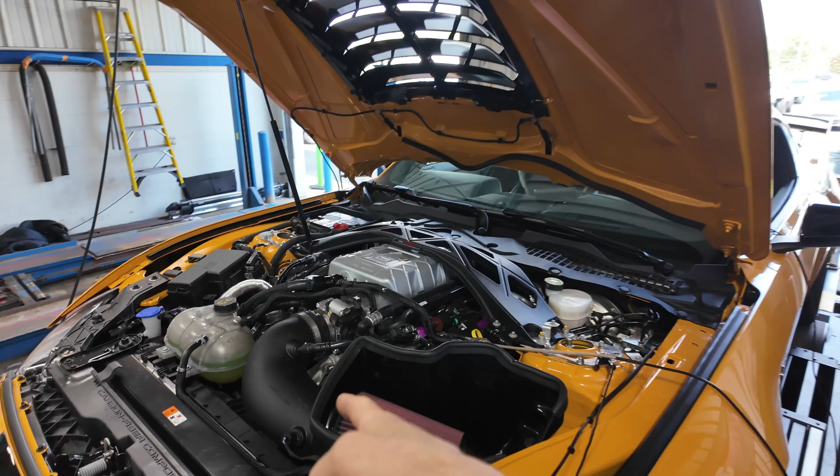So the 800R package gets into some bolt-ons here on these GT500s. So I'll walk up here and we'll take a look. So JLT Cold Air, we definitely do that. That's our favorite intake. It does have the VMP Predator lid and cooler, the race cooler.

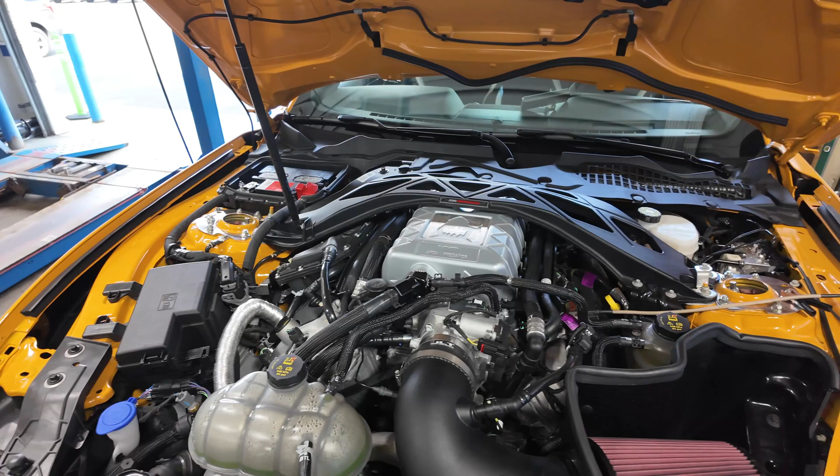It's got a set of 2-inch long tube headers on it, American Racing headers, and the 3-inch American Racing X pipe with the silencers, and those are hooked to the stock mufflers. The R package that we do on these cars is a bunch of suspension goodies. We kind of dig into the BMR catalog quite a bit.

We do radius rod bushings in the front. We do all the arms in the rear. We do the toe links. We do the camber arms. We do the big rubber control arm, lower control arm bushing on these S550s. We do the spherical bearing there. We do the toe link bushings in the knuckles that Steeda/Ford Racing sells. We lock the cradle out. We lock the diff out with urethane.

All that stuff combined helps these cars immensely on track with the steering feel, the road holding. I should also mention, we also do Ground Control caster camber plates, so we can dial in some camber. We like running a little over 3 degrees of camber on these GT500s in the front and a little over 2 in the rear when we're running slicks. He does run slicks on this car, Hoosier R7s. So we spec our alignment settings for slicks.

But as far as the power mods go, what we're looking at today on the dyno, it's just a bolt-on package. We leave the stock pulley for guys that road race these cars, unless they're really trying to push stuff. I highly recommend just leaving the stock pulley. These things make plenty of horsepower. And we call it an 800 package because it makes 800 at the rear tires on pump gas.

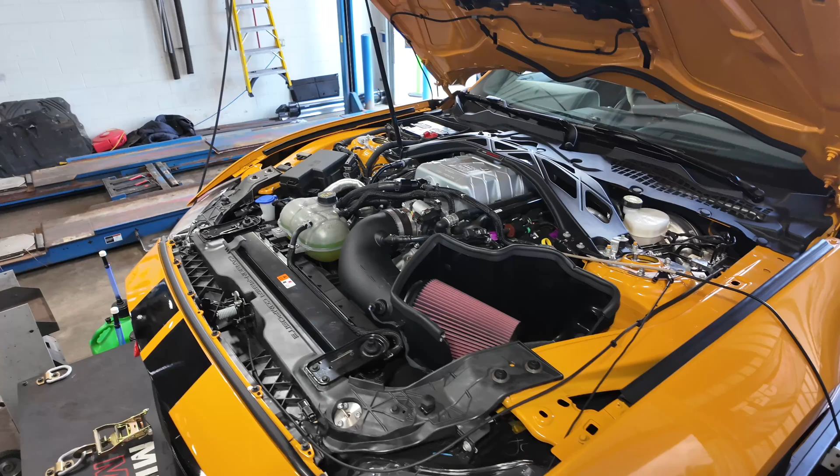So, like I said, cold air, lid, cooler, headers, and that's pretty much it. It's just basically external bolt-ons on this car. And we are increasing the power over 100 at the rear wheels. So move the screen here. We can take a look at where I'm at so far. I left up most of the working runs here. I've done enough of these 800 packages where I can throw a startup tune in it, and I really only have to do 3-4 pulls on these things to get these dialed in.

Since this is pump gas, it still has the stock fuel system on it, stock injectors, stock fuel rails. We're not getting too far into adjusting fuel system stuff. I do obviously have to make some changes to the speed density model. These GT500s do not run a mass airflow sensor. They're just strictly speed density based. And so you get into the speed density model to adjust fueling.

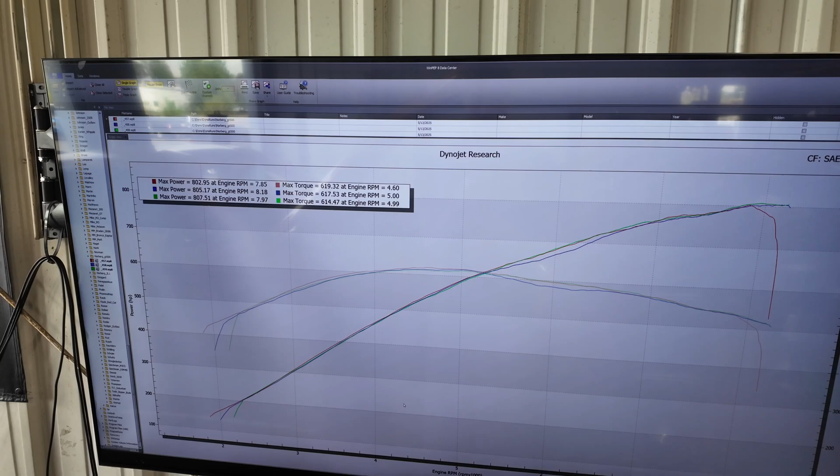And the headers do change the fueling. I do have to add between 3 and 6%, depending on where in the RPM range. Typically in the mid-range, where the headers actually add a lot of scavenging effect of the exhaust to the engine, in the mid-range primarily.

Obviously they help flow up top, but also, because of the long tubes merging into a collector, the exhaust pulses help pull low pressure into the other tubes as the cylinders are firing, and that scavenging effect really is amplified in the mid-range, between 4,000 and 6,000 RPM.

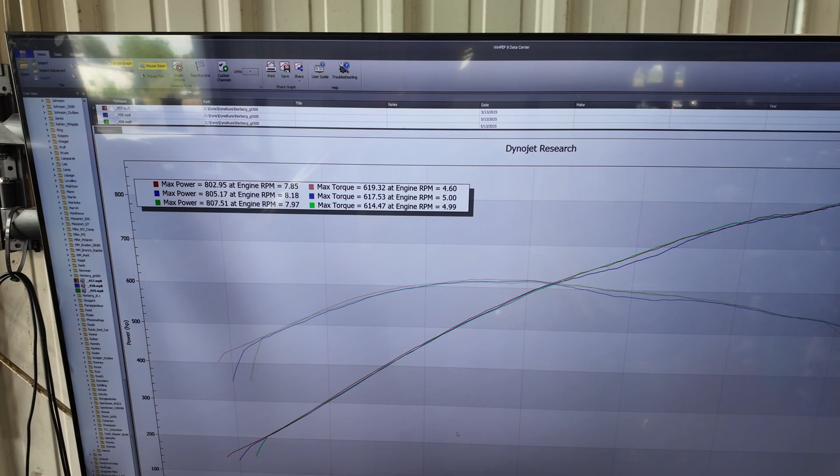So that's usually where I have to end up adding the most amount of fuel when we do long tube headers on these things. But pretty much across the board, I have to add fuel the most in the mid-range. So yeah, you can see this is our 800 package, and we are at just over 800 wheel.

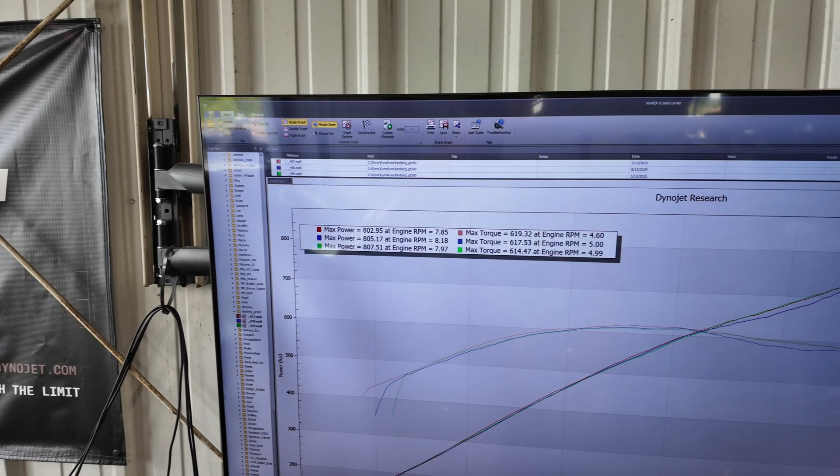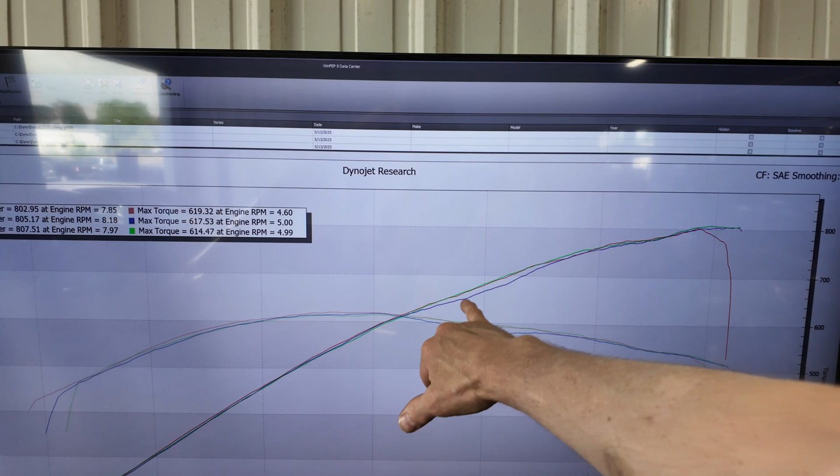The first pull there was the red one. It was the timing I had adjusted a little bit. The next one I took a little bit too much out and added a little too much fuel on that blue. And then the green one was the one I just did. And you can see it's nice and smooth.

I'm going to do one more here, obviously. We'll video that, and we'll take a look at the final results and the dyno graph. But so far, this is pretty typical of our 800 package. You know, again, just some external bolt-ons. Yeah, I mean, it doesn't take much to get these types of numbers out of these cars.

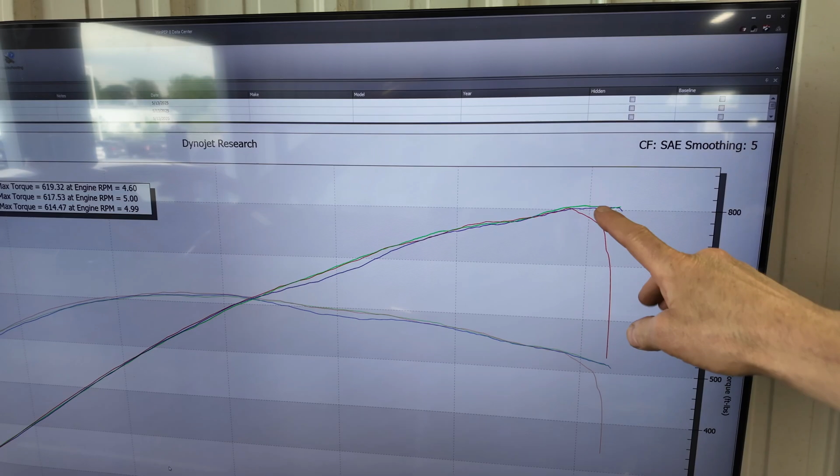Obviously, we are extending the factory RPM range quite a bit. Well, not quite a bit, but about 500-600 RPM. Typically, I'm revving these cars, I set the rev limiters at 8,400 on the stock boost level like we see with these. Since this does not have a ported blower, we are still seeing about stock boost levels.

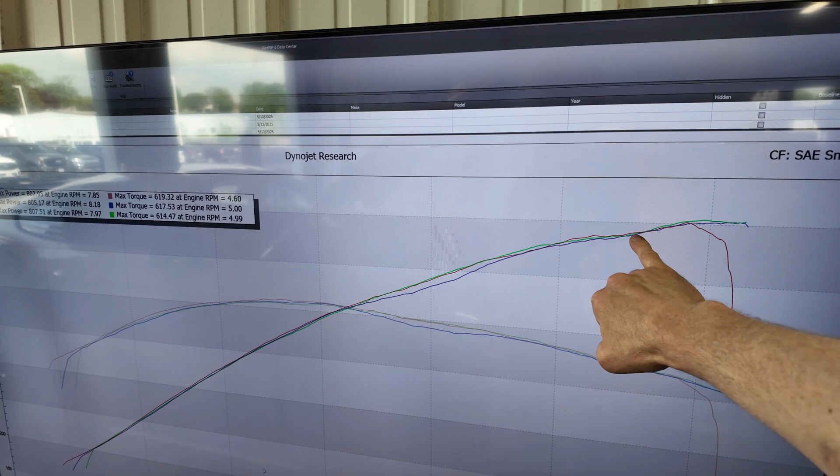You know, we do pick up about a pound of boost going from 7,500 of the factory rev limiter up to the 8,400. We are picking up a pound of boost just revving it that little bit extra. But because I'm not adding a whole ton of boost to it, I'm still comfortable revving them pretty high.

Now, once you start putting higher boost numbers with ported blowers, you do have to be mindful of the stock valve springs. You do run into a limit of those when you start putting more boost pressure in the manifold, and subsequently in the head ports, which puts more pressure against the valves that wants to push the valves open, and you end up with valve control issues if you rev them too high with too much boost.

So, because again, we're on the stock pulley, we're seeing just over stock boost, I am comfortable with an 8,400 hard limiter. I set the transmission up in these cars to shift about right at 7,900 for road racing. I don't like going any higher than that for road racing, just for engine longevity and for oil temperature.

So when we're really revving them high, everything is working a little harder. The oil pump's working harder to pump the oil. The VCT actuators are working harder. So I typically keep it just under 8,000, up from the 7,400. So I up the shift point about 500 RPM.

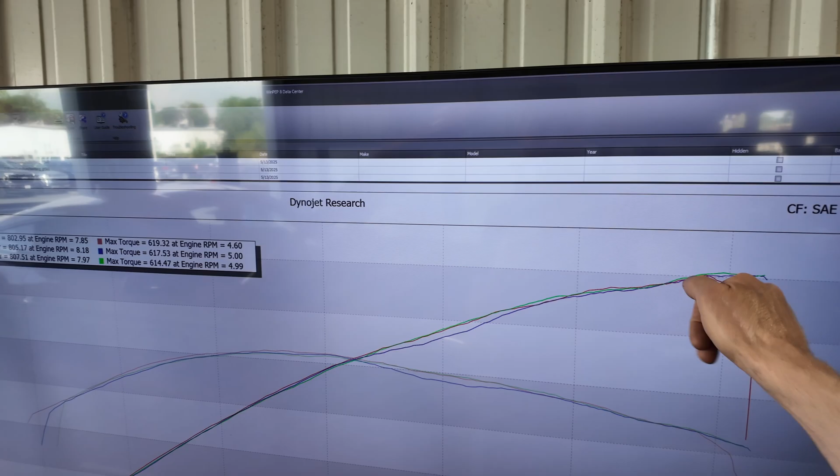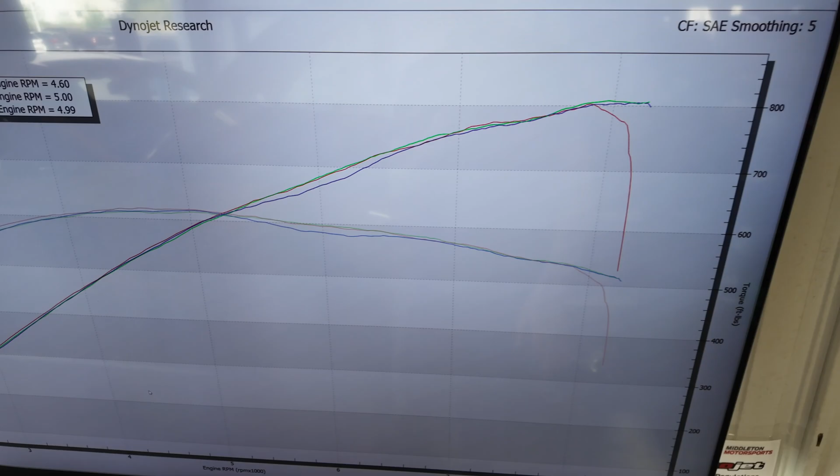But again, then you're getting into that little bit extra horsepower you're making at the very top here. So instead of shifting right here at 7,500, we're shifting it up here just before 8. So you take advantage of that little extra power we make up here. Otherwise, we're up over stock.

These cars typically on 93 octane will make 680 on average. Some are making 670 if maybe they're a little newer car with a tighter engine. I've seen as high as 690 out of a completely stock one. That's about as high as I've ever seen. So we are up over 100 at the rear wheels.

I've dynoed dozens of these things bone stock, and they all make between that number depending on the fuel. The majority of that variance comes from if it's 91 octane or 93 octane. Again, because the timing system in these cars is floating and closed loop, it will add timing with better fuel automatically.

So I'm gonna put the camera down. We're gonna spin one more pull up here. We'll take a look at the final numbers. Hopefully it's not too heat soaked. It's been sitting here for about 10 minutes with the fans off, so I'll kick the fans on, and the car should be still up to temperature as far as coolant and oil.

And we'll look at our final number. I'll probably clear these runs off and just leave that 807 so we're not looking at a bunch stacked up, because it gets a little busy on the screen. And then we'll look at the data log, and we will wrap this one up.

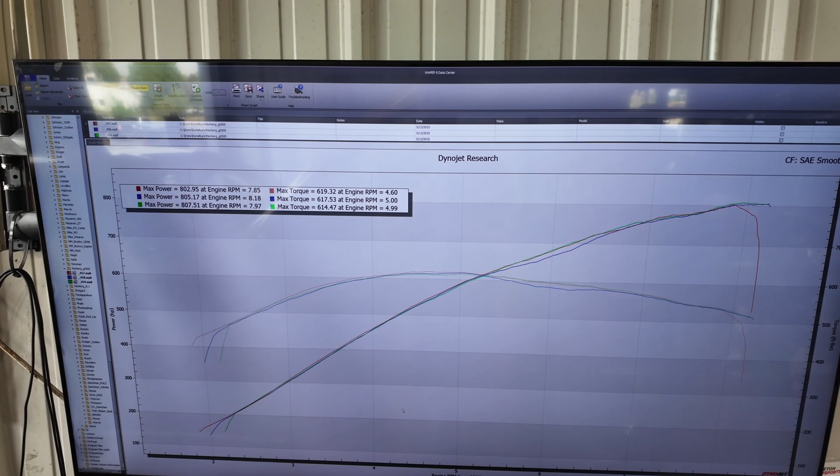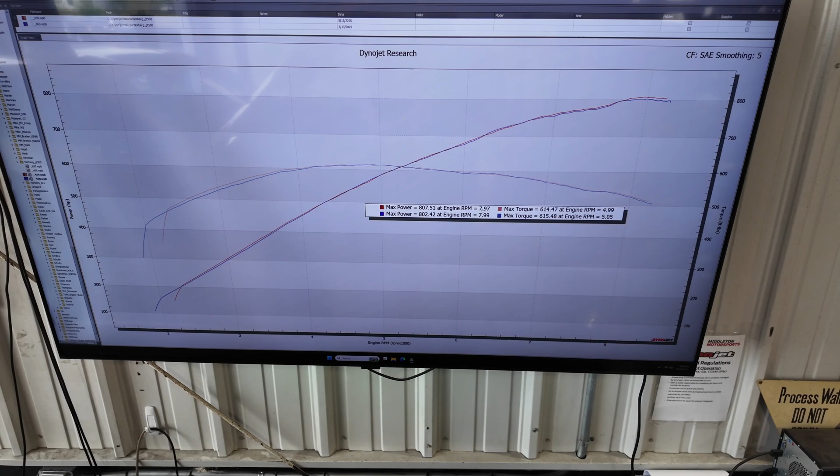Looks like it made just a smidge less up at the top, but we were about 10 degrees hotter on the manifold temperatures on that pull versus the red pull. So, yeah, just because it sat here and I had the fans turned off while I was getting the camera ready and stuff. It was about 100 degrees on the blue pull, about 90 degrees of manifold temperature on the red pull. So just lost a little bit, but you can see the graphs are pretty much overlaying. Yeah, I'm not too worried about that.

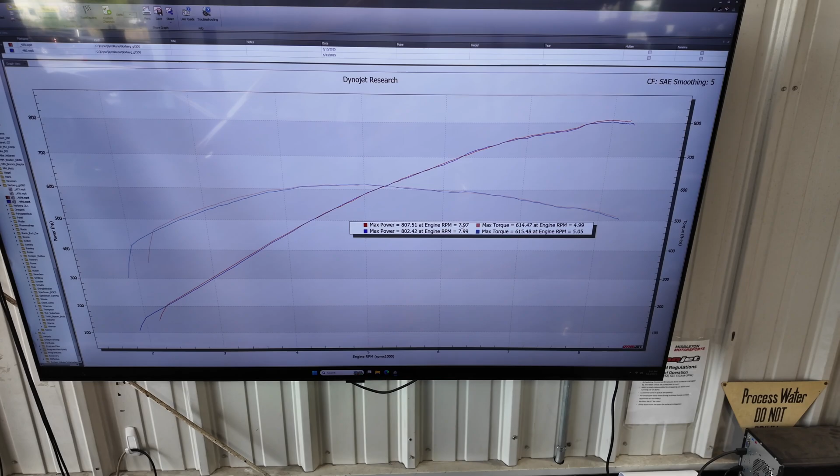That's a 5 horsepower difference. At this power level it's kind of just a variance of dyno and temperature. So because the graphs overlay so nicely, that's looking really good to me. Again, still over 800 wheel, still hitting that 615 torque, right about where we were. So yeah, that looks good. That's pretty typical for our 800 package, that dyno graph. Nice smooth curve. Real straight line, real broad power band. Obviously supercharged car, this style blower will make that. So we'll take a look at the data log.

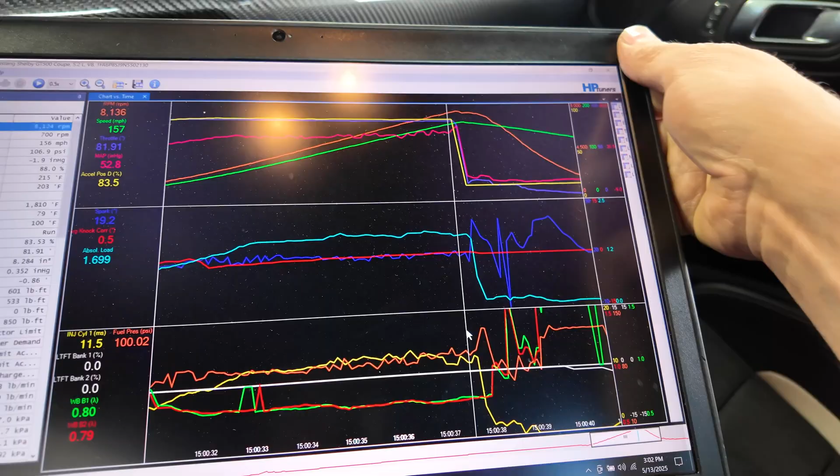Jump in the car here. All right, let me see if I can get the camera lined up. All right, so without too much glare.

All right, so timing. Since this is a pump gas car, we're definitely gonna see a little bit of knock correction going on up and down. If you've watched some of the other videos where I'm doing E85, typically I'll just kind of set the timing where it's gonna make peak power, and the HDFX system really won't do much on those cars. But because this is a pump gas car, obviously I'm not trying to throw a bunch of timing at it and then let the knock sensors pull it all out.

Typically I'll try to run the borderline table about where it's going to be happy, and then if he's got a better tank of fuel, it might add a little bit. And you can see it did pull about a degree when I first rolled into it there, but it came back, and then even then some, it added half a degree at the top there.

So this car, again, 93 octane on these cars with this bolt-on package with the stock pulley, you're into the low 20s for timing. 91 octane, you'll typically be 17 to 18 degrees, and that's where I talk about that 20 horsepower difference between even a stock pulley making 670 to 690, or this 800 package making a little over 800 or 780-ish. You know, I've even seen as low as 775 on some of the poor 91 we have around here, and some guys just choose to go to those fuel stations because it's easy, and the cars will still run okay on it. They just run a little less timing.

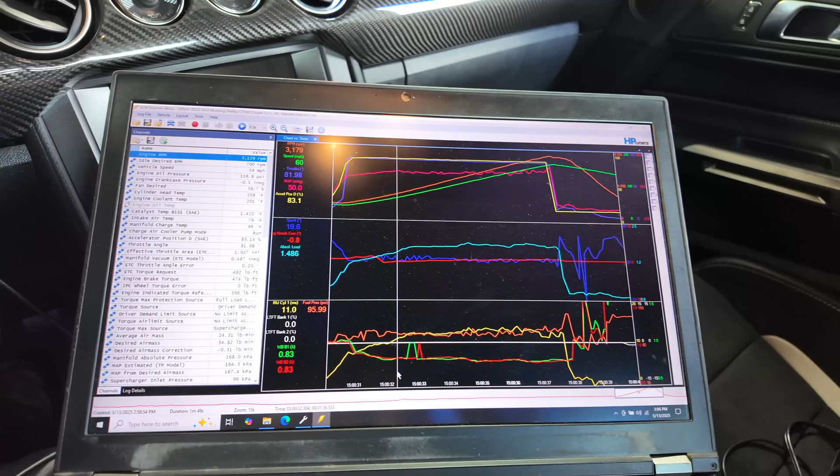So air-fuel ratio, I kind of follow the factory on the pump gas, bolt-on stuff. I kind of follow a little bit of the factory fueling strategy where you can run it a little bit leaner where the boost is a little bit lower in some of the lower RPM ranges. But once you get up past 5,000 RPM, I like putting a little bit more fuel in these things. Obviously, we're getting rid of the cat enrichment on the fueling strategy. And I'll typically target 0.79 lambda on gas and 0.8 lambda on E85.

I find on gasoline, 91 and 93, especially the 91, even 0.78 if it's strictly going to be a 91 car, because they will take a little more timing if they're rich like that. And the timing does make more of a difference than adding a smidge of fuel. Now, richening them up without adding timing will take some power away, but the fact that we can add maybe a degree more by putting 0.78 versus 0.8 on pump gas, the 5 or 8 horsepower you lose with the extra richness, you're going to gain back, and then some with an extra degree of timing.

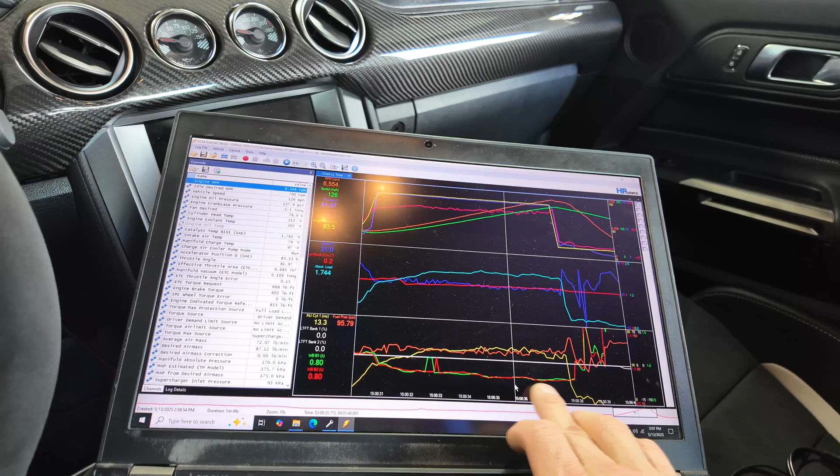So this car I'm targeting 0.79 at the top here, so you can kind of see how the air fuel is leaner, and then it steps down right in here, right in that kind of low 5,000 area. It starts to step down by 5,500. I'm running that kind of 0.78, 0.79. You can see it's running. And again, these are closed loop, so

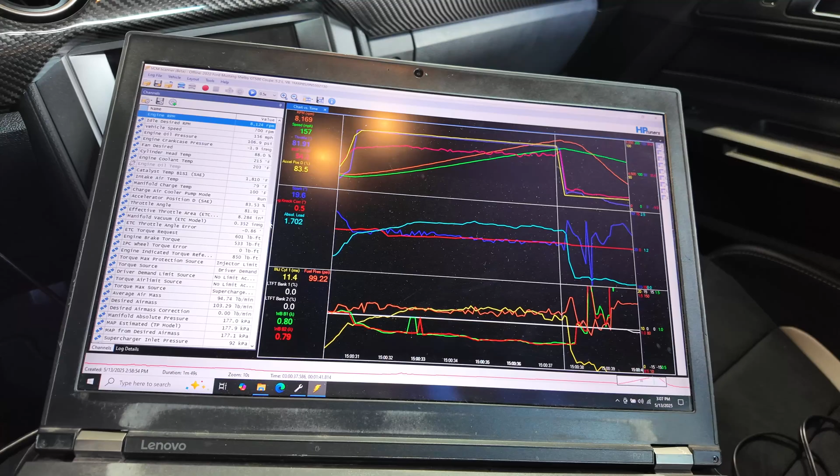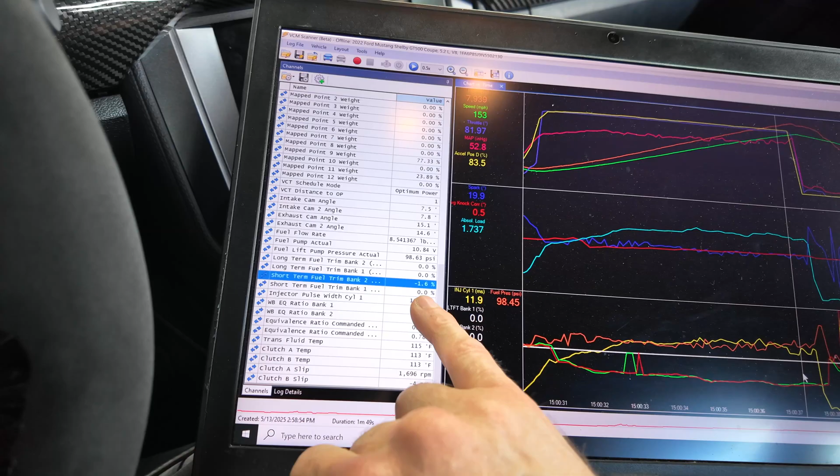I'll highlight that fuel trim there, and you can see as I'm scrolling across, pretty close on the fuel trims. It's right about zero. It's adding a smidge there, taking away, so it's real close. I like to try to nail these real close to zero. So you can see the short term is what the closed loop system is using under power enrichment to add and subtract fuel around the target lambda that I'm targeting. So in the tune here, there's these power enrichment settings, and this is going to be where the target is for the air fuel.

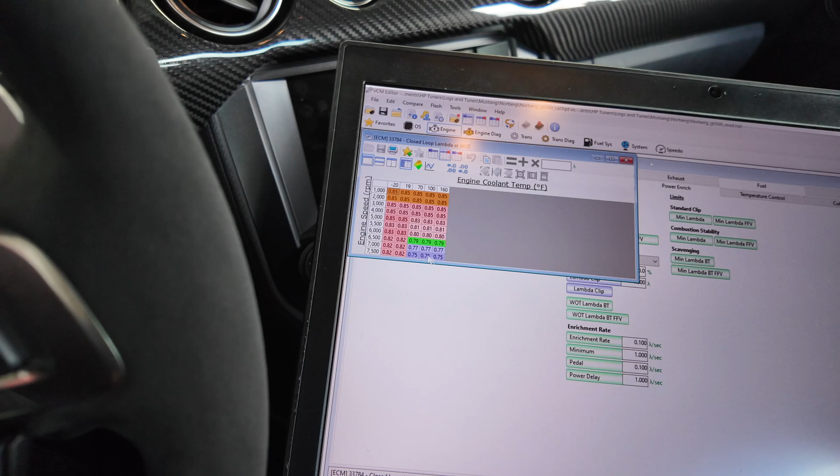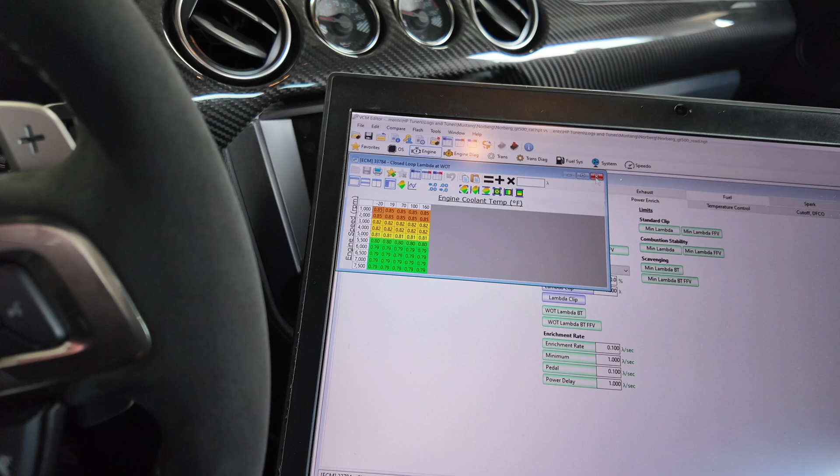So I kind of follow this type of strategy where the factory does this, where it's pretty lean down low, and then it gets really rich up top, which I find is just going to kill power. That's part of having the cat enrichment strategy. There's also another cat enrichment strategy on top of that to add even more fuel that I basically eliminate. This is how I set it up. I find this is kind of the best fueling strategy. Obviously there's other popular GT500 and Coyote tuners out there. They may do it differently, but some of those other shops get really aggressive with these cars, and if you get real aggressive on these tunes, you're not going to be road racing them and have them live. But anyway, this is how I set it up.

I personally owned a GT500, a '20. I did a lot of testing with that car. Chuck, one of the owners of the dealership here, basically our overseer of everything here in motorsports, had his Grabber Lime car. We did a ton of testing on that car. This guy and other customers, we all road race with these guys. They all come to our track days, and I have a ton of data at Road America, Blackhawk, COTA in Texas, Ozarks, a bunch of tracks around the country in these GT500s, and so I know where they'll be happy. They rip down the straightaways, they put up big top speeds, quick lap times. So this is how I do it.

So yeah, this is looking really good. This is exactly where I wanted to see. I'm happy to be able to tune one of these on 93. We don't get a lot of them, but these guys have good 93 available. This car, with the ability to run these low 20s, 21 degrees of timing at the top end like that, that is nice to see on pump gas.

A lot of times we don't have that luxury, and these guys are putting the 91 in them, and we're down 20 wheel from where we're at with this one. But this one is right where we want to be. I think that's pretty much it. This is not the first one of these cars I've done videos on, so hopefully I'm answering any questions that you guys have on these cars.

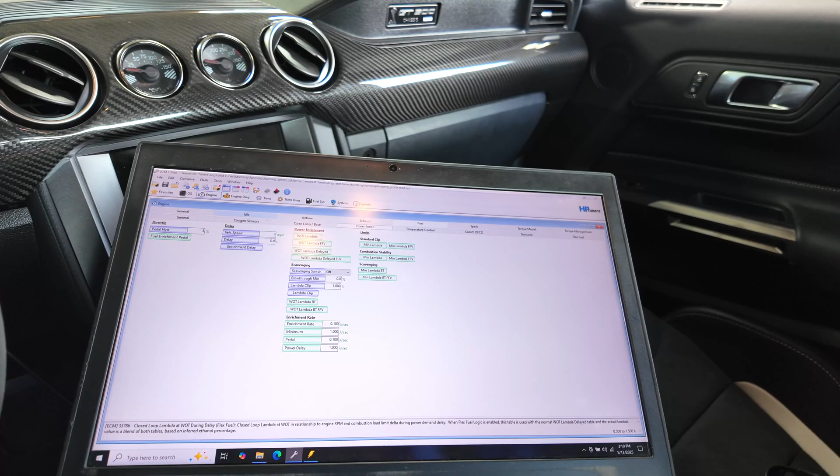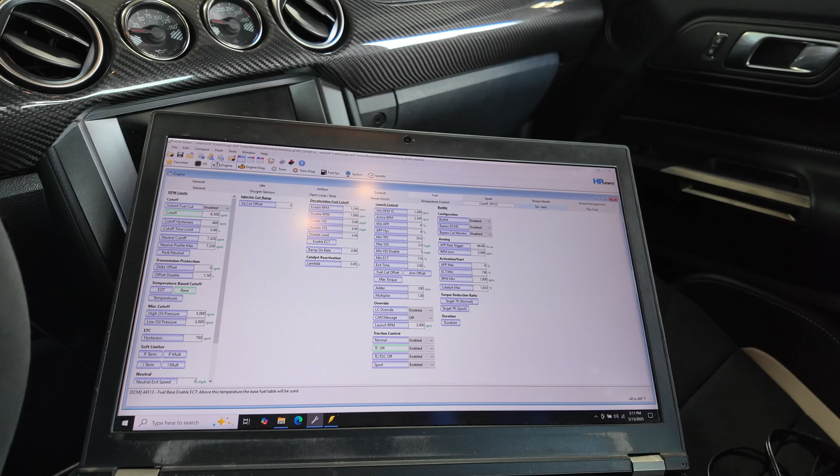There is quite a bit of stuff I changed in these tunes. You can see the green highlighted tables and menus and PIDs, drop downs, everything that I change in these things. There's a lot of stuff that I change on these cars when we do headers and cold air and the tuning like this. I changed the spark strategy quite a bit. Like I said, I have to change the speed density model.

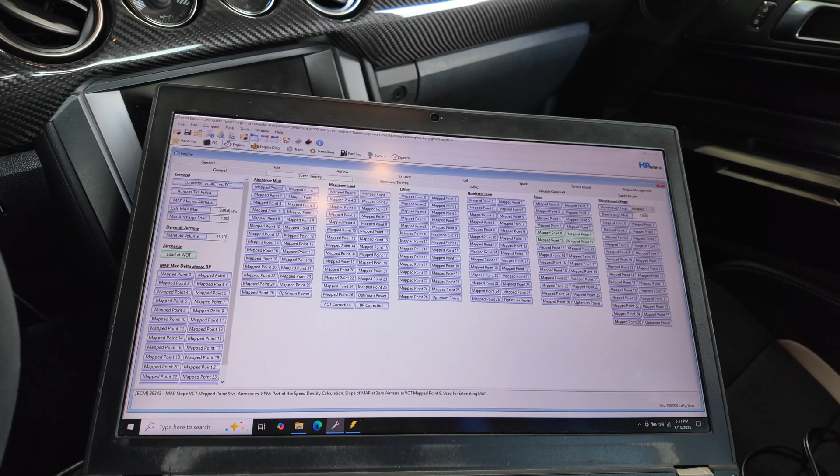Typically in the mid ranges on the headers, I don't have to touch, but these 8, 9, 10, and 11, that's the mapped points, is again how Ford kind of runs the different modes that the engine will see depending on the cam angles and where the VCT is putting the cams, which changes the VE of the engine, which changes the timing requirement and the fueling requirement. So Ford has laid it out into like a map point.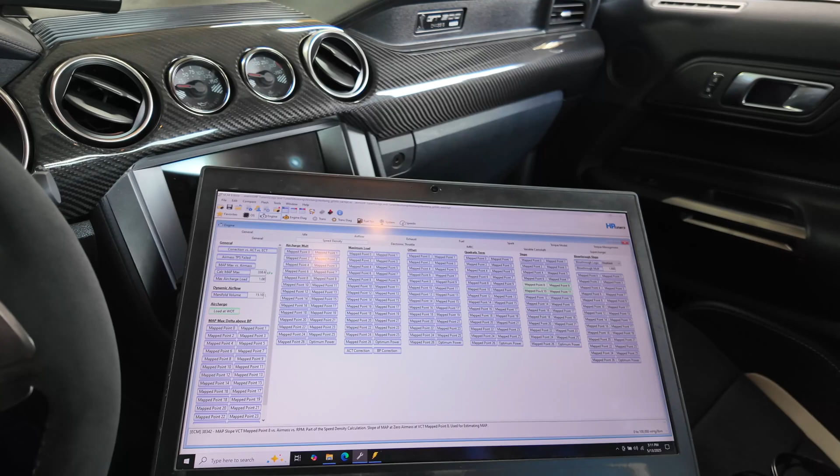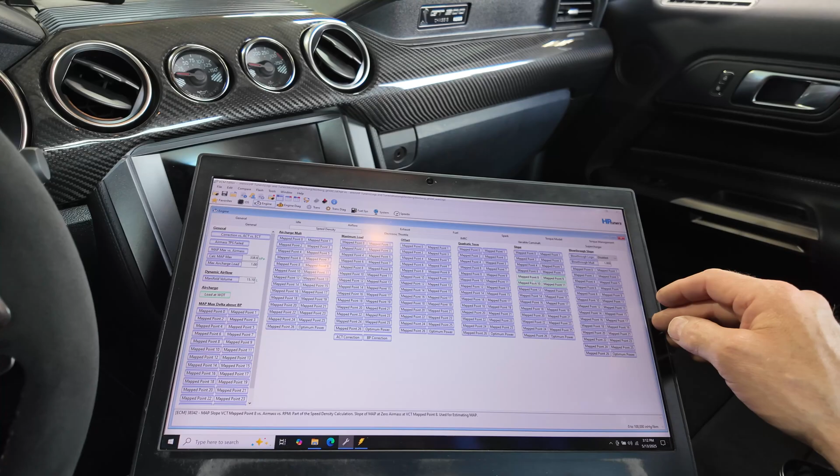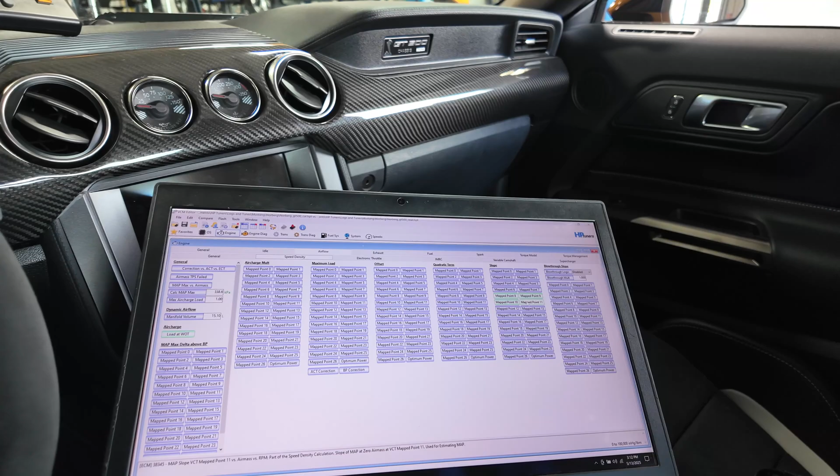GT500, since they don't have IMRCs, they only run half the map points. Like a Mustang GT is going to run all the map points, and they take a little longer to tune, especially when you ProCharge one or ESS boost one or turbocharge one, and you still have an IMRC intake. It gets a little more complicated. These GT500s, because they're factory supercharged, only use the first 14 map points.

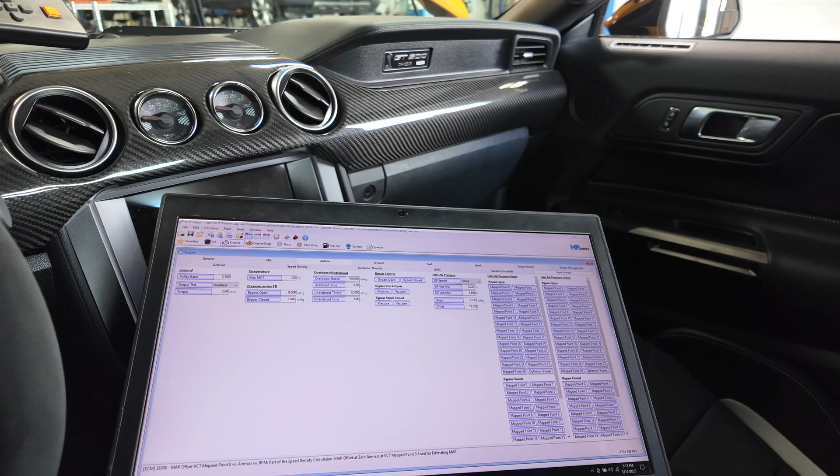Otherwise, there's quite a bit of the stuff I do change, and obviously I'm not going to go over everything, and I'm not here to teach you guys how to tune these things. I just like going over the overview of what we do and why we do it, and what type of mods gain what type of power. And then I like looking at data logs. I'm a nerd for data, and this car I'm obviously using HP Tuners with.

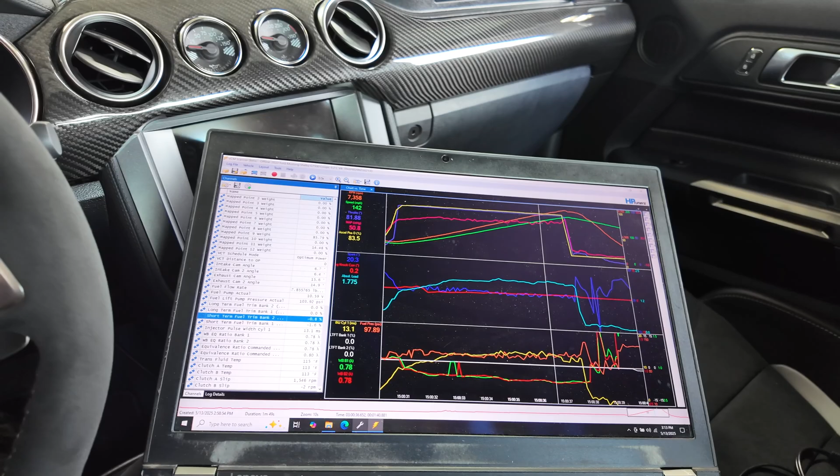Some of these other cars, the fuel systems, flex fuel, I'm using PCM Tech, which I also really like that software. A little more complicated to use because they pretty much define everything that's in the PCM, versus HP Tuners kind of defines what they think we just need, which I wish there was more, but that's what we have PCM Tech for.